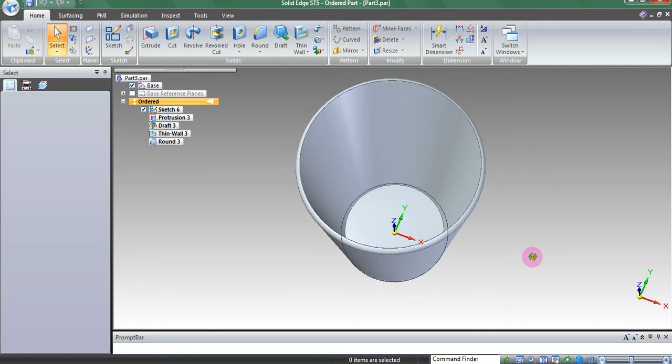In this tutorial, you will be creating a cup two different ways. The first way is by creating the majority of the cup shape in a 2D sketch and using 3D modeling features to add final finishing touches. The second way is by creating a 2D sketch with one circle and using 3D modeling features to create the rest of the cup.

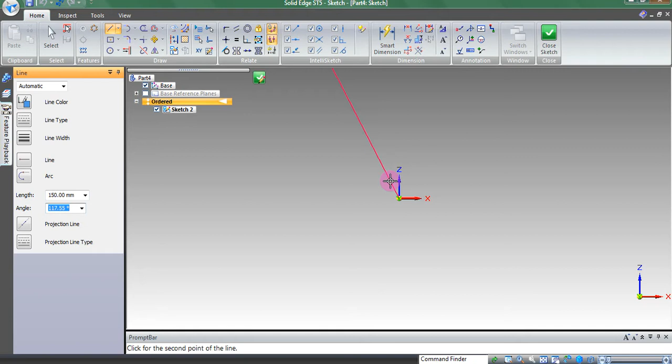On the Home tab, start a sketch on the XZ plane. First, we'll create the line to represent the height of the cup. Click at the origin to set the first endpoint of the line. Enter in a length of 150 millimeters. When the IntelliSketch icon for vertical line appears, click to place the line.

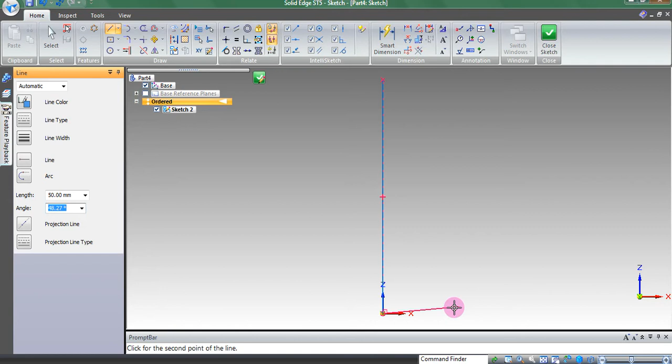Next, we'll create the base of the cup. Hover around the origin until the IntelliSketch icon appears for an endpoint. Click to set the first endpoint of the line. Enter a length of 50 millimeters. When the IntelliSketch icon for horizontal line appears, click to place the line.

Now for the side of the cup. We don't know how long the line is, but we know it should be at a 75-degree angle. Enter an angle of 75 degrees and extend the line so it approaches the height of the first line. IntelliSketch will highlight the first line once you reach the same height. Click to place the line. Complete the sketch profile by connecting the last line with the first line.

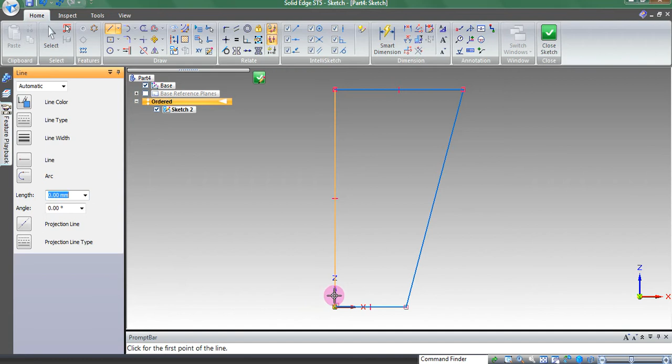Now we have the overall shape of the cup, but we still need for it to be hollowed out on the inside, not solid. The wall thickness should be 5 millimeters. We're going to make a guess of where 5 millimeters is and begin a line. Draw the line until it is about 5 millimeters away from the 75-degree line. Click to create an endpoint. Create a line from this endpoint that is parallel to the 75-degree line and ends at the top horizontal line. Now we have our thickness.

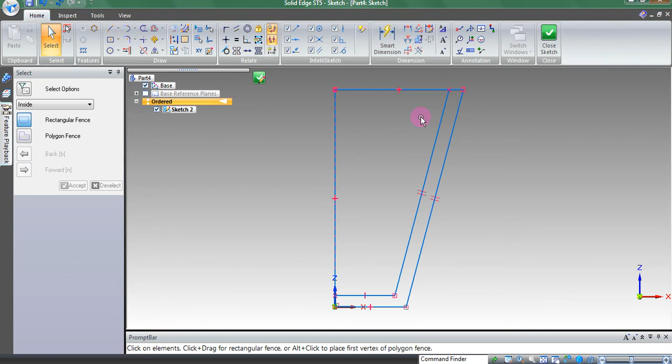These extra lines have to be deleted for the sketch to work. We will use trim to get rid of these lines. Trim deletes unneeded lines and closes endpoints automatically. Trim the two extra lines.

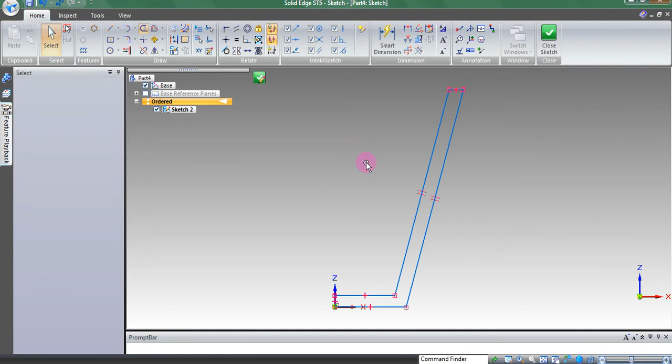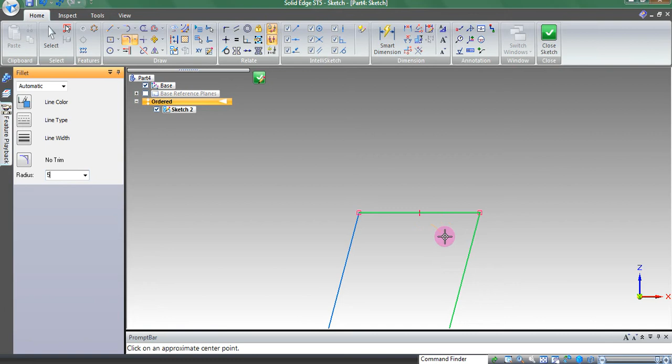The last sketch feature is rounded top edges. Click on Fillet. Fillet creates rounded corners and automatically trims lines. Click on the two lines forming a corner. Enter a radius of 5 millimeters. The sketch is now complete. Close the sketch.

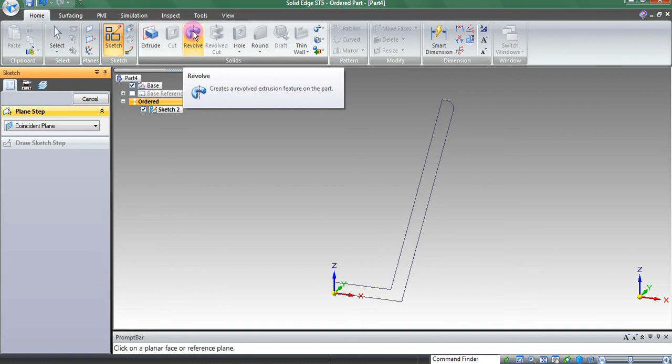The last step to create the cup is a revolve protrusion. Revolves create a 3D surface of a sketch rotated around a certain angle that is on a defined axis. Select Revolve, the sketch, and click Accept. Choose the axis of rotation. Select Revolve 360 degrees. You are now done with method 1 of creating the cup.

The second method of creating a cup begins the same way, with the sketch. This time we will select the XY plane as our sketching plane. Create a circle with its center point at the origin. Enter a radius of 50 millimeters. Close the sketch.

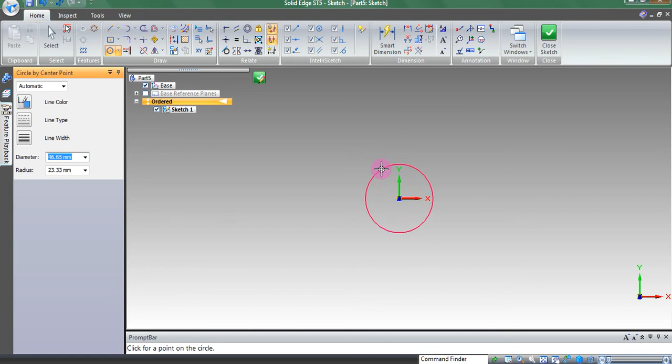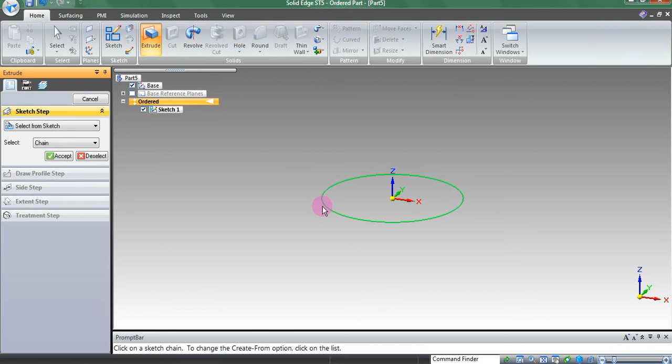From this point on, all features will be created in 3D. Select Extrude, the sketch, and Accept. Extrude creates a 3D surface of a sketch. Enter a distance of 150. Select the option of extrusion in the positive Z direction. This is the height of the cup.

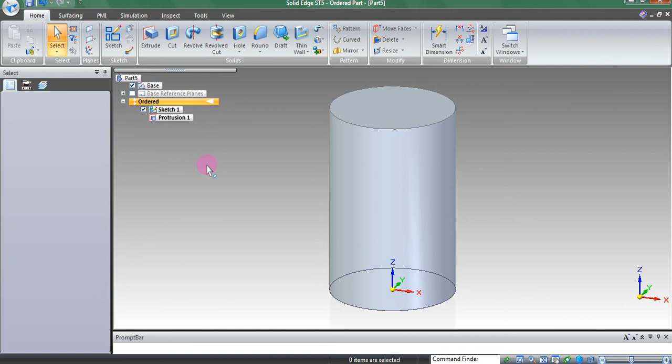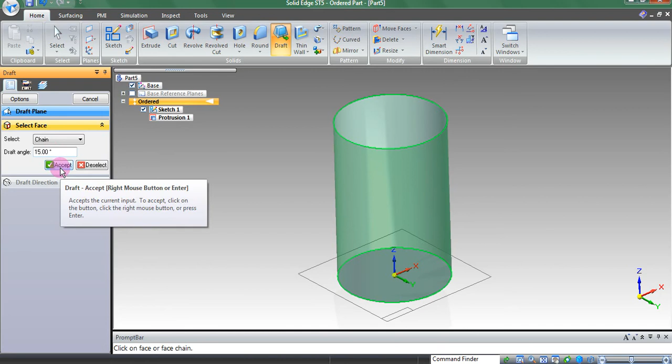Now we need the angled sides of the cup. For this we'll use draft angles. Draft angles form angles by pushing or pulling the selected faces. Select the bottom of the cup. This signifies that this face is neutral and will not be altered. Next, select the surfaces that change. Enter a draft angle of 15 degrees, click Accept, and Next. Decide the direction of the draft angle. Click and hit Finish.

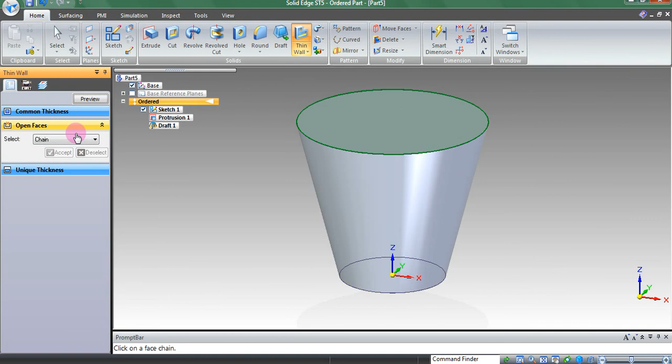We'll create a cup thickness using Thin Wall. Thin Wall removes material from a model to a specified thickness. Enter a common thickness of 5 millimeters. Select the top surface, hit Preview, and Finish. The last step is to round the top edge of the cup. Select Round Edge, Corner. Enter a radius of 5 millimeters and click Accept.

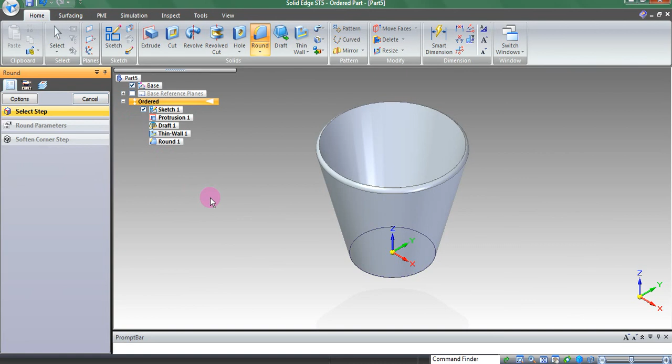You have now completed one model in 2 different ways. Hopefully you are now aware that it is best to create simple sketches and leave complex features for the 3D environment. This is a good skill to develop and will save time if a part requires modification later.